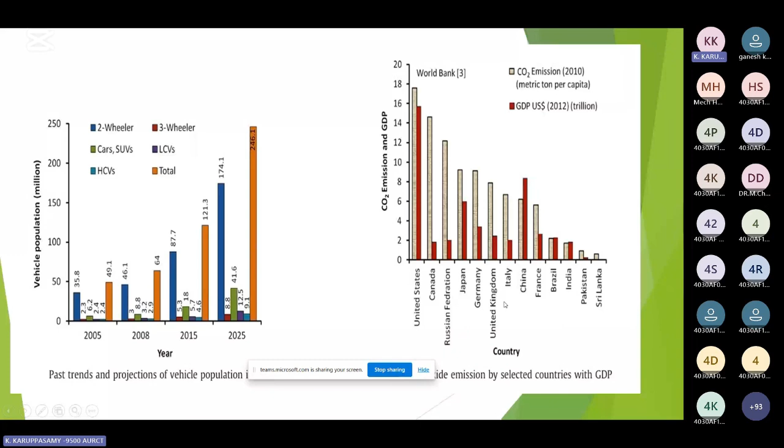Some of the selected countries are mentioned in this graph. So India's petroleum statistics for the current consumption for this year 2023-24 is 234 million metric tons. Our indigenous production is around 50, so we are importing a maximum of 180 metric tons. The cost of import is around 8 lakh crores we are spending.

For petroleum, the usage in the transport sector is around 80%. The annual consumption growth is 10% in the other sectors.

So the pollutions from conventional fuels: the major pollutants from diesel fuel are smoke, soot, oxides of nitrogen, carbon monoxide, and unburned hydrocarbons. These are the emissions coming from diesel vehicles. But oxides of nitrogen and soot are the major problems, released in higher amounts compared to gasoline.

If you go for gasoline, you have carbon monoxide, unburned hydrocarbons, and oxides of nitrogen. Here, oxides of nitrogen is the major problem for gasoline vehicles. So these are the emissions we are facing today in India.

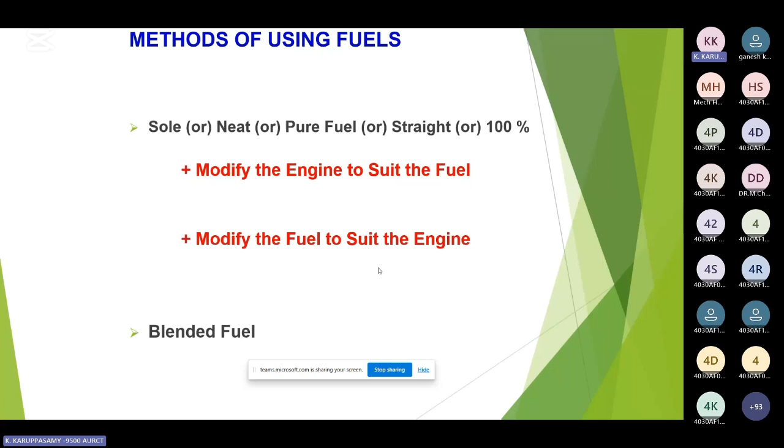Now we go into alternative fuel technology. Here, either we can use the alternative fuel as a sole fuel, neat fuel, or pure fuel state, or we can modify the engine to suit the fuel, or modify the fuel to suit the engine, or we can blend the fuel. These are the methods of using alternative fuels in engines.

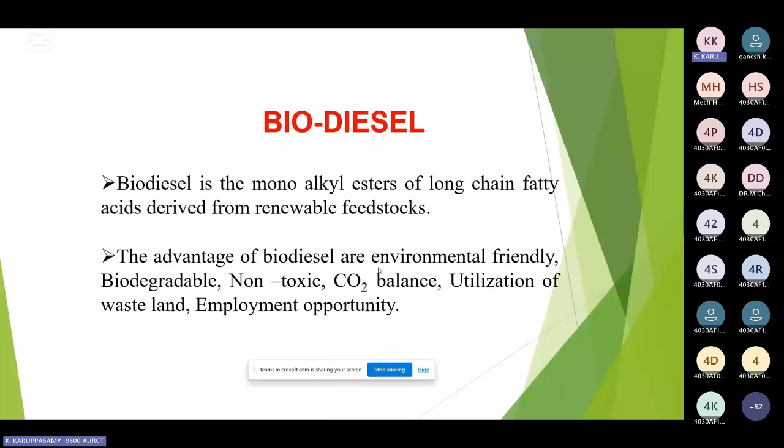Biodiesel is normally a monoalkyl ester of long chain fatty acids derived from renewable feedstock. The advantages of biodiesel are: environmentally friendly, biodegradable, non-toxic, CO2 balance, and utilization of waste. We are utilizing wastelands, and there are employment opportunities.

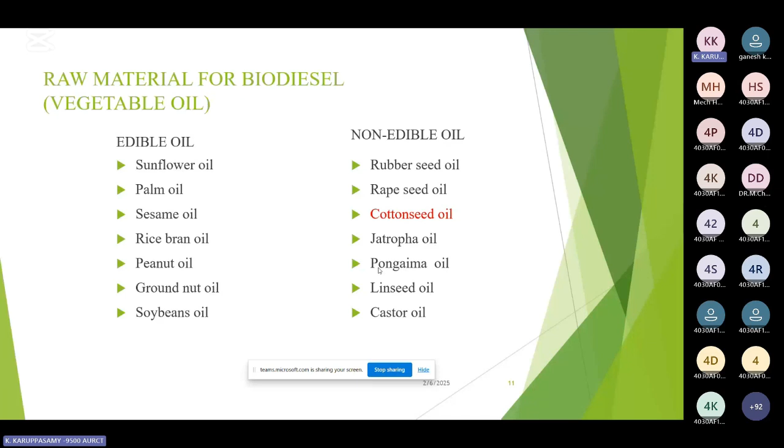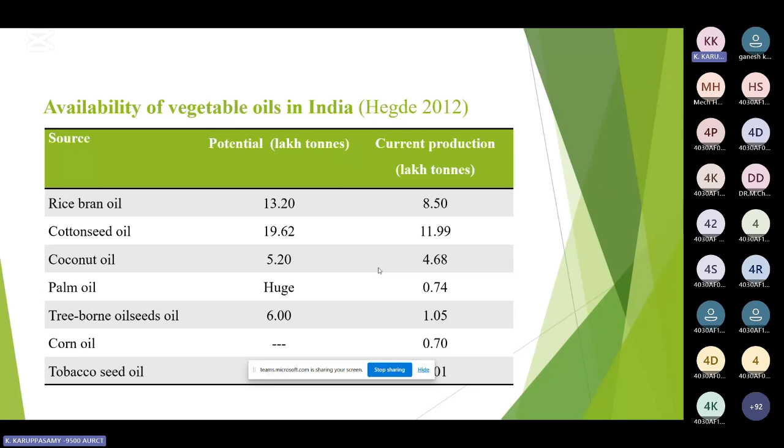So these are the availability of vegetable oil in India in 2012 statistics. Some of the statistics: cotton seed oil production is around 11.9 lakh ton, and rice bran oil around 8.5 lakh ton.

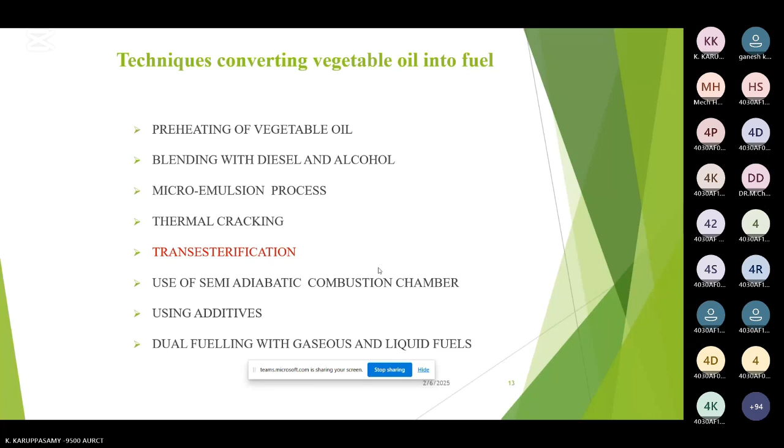So triglyceride into monoglyceride, that is monoalkyl esters. Then there's the use of adiabatic combustion chamber engines, using additives, and dual fueling with gaseous and liquid fuels. Transesterification converts glycerol esters into alkyl esters in the presence of a catalyst. NaOH or KOH catalyst is preferably used for biodiesel production.

Methanol or ethanol is used as the alcohol, along with NaOH or KOH catalyst. Finally, the alcohol esters, biodiesels, and pure glycerin are obtained after the reaction.

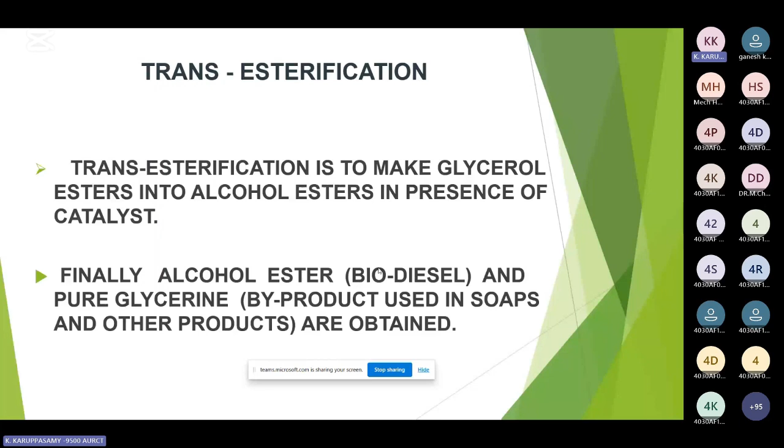Using a magnetic stirrer, we heat the oil up to 65 degrees, and with proper stirring, the catalyst and vegetable oil mix. After the reaction, with a 3-hour reaction time, we get biodiesel as well as glycerin.

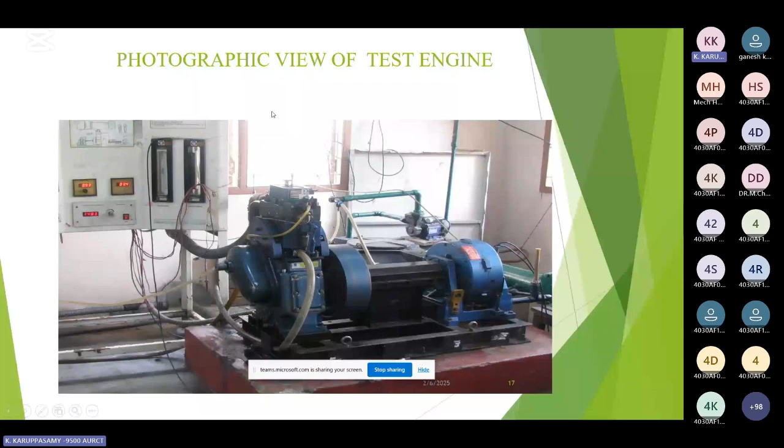For combustion, we have to measure the pressure and temperature inside the combustion chamber using a combustion analyzer. With this combustion P-theta analyzer, we can find the P-theta diagram, estimate the pressure crank angle diagram, heat release rate, and other parameters.

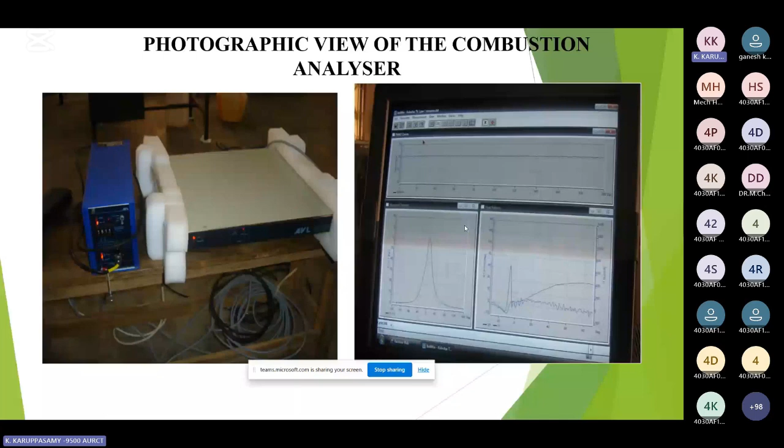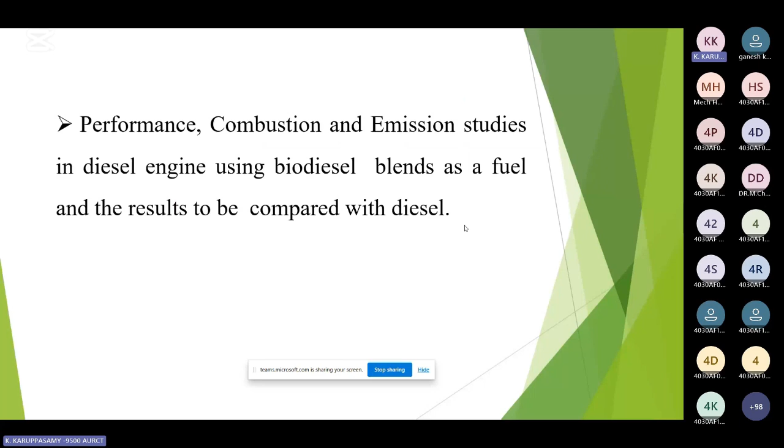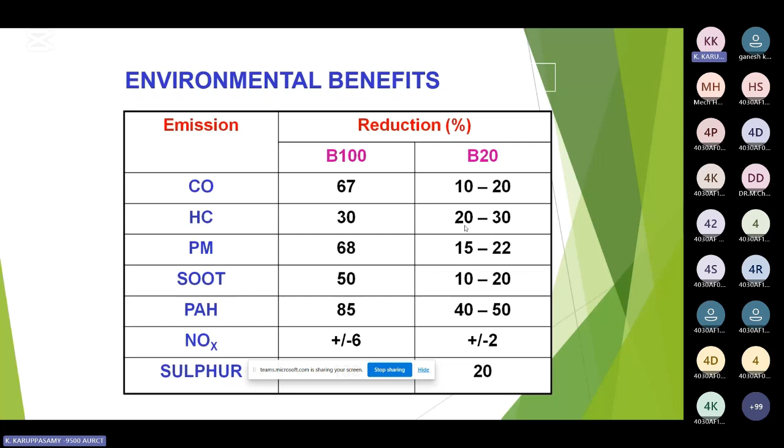When you use biodiesel as fuel, the emissions are comparatively reduced for both 100% and B20 fuel, because biodiesel itself contains excess oxygen. That is one of the reasons we go for alcohol fuel, which is obtained from natural sources as well as manufacturing methods.

Methanol and ethanol are the alcohols we are using. Some advantages of these alcohol fuels: they are obtained from a number of sources, both natural and manufactured. This is a high octane fuel, with an anti-knocking index over 100. It produces overall less emissions compared to gasoline.

It has a high latent heat of vaporization, which results in a cooler intake process, giving us less NOx emissions. And alcohols have low sulfur content in the fuel.

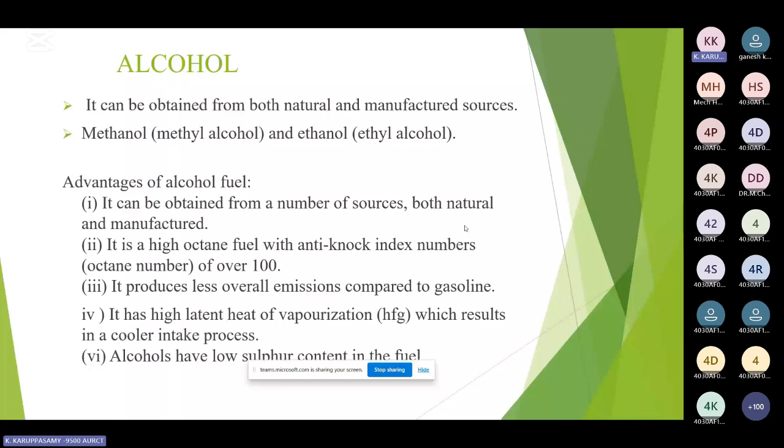Disadvantages of alcohols: they have low energy content, so the calorific value is very low compared to diesel and petrol. Combustion of alcohol produces more aldehydes, and it is more corrosive than gasoline. It has poor cold weather starting characteristics, and the flame is almost invisible, so it is dangerous when handling the fuel.

So these are the properties of different fuels: gasoline, diesel, ethanol, and methanol. In terms of calorific value, you can see that methanol and ethanol have very low values - ethanol is 27 megajoules and methanol is 20, compared to gasoline at 44 megajoules and diesel at 43 megajoules.

These are the stoichiometric air fuel ratios: for gasoline 14.9 and diesel 14.5. Ethanol and methanol have a very low carbon to hydrogen ratio, therefore a lesser amount of oxygen is required for complete combustion.

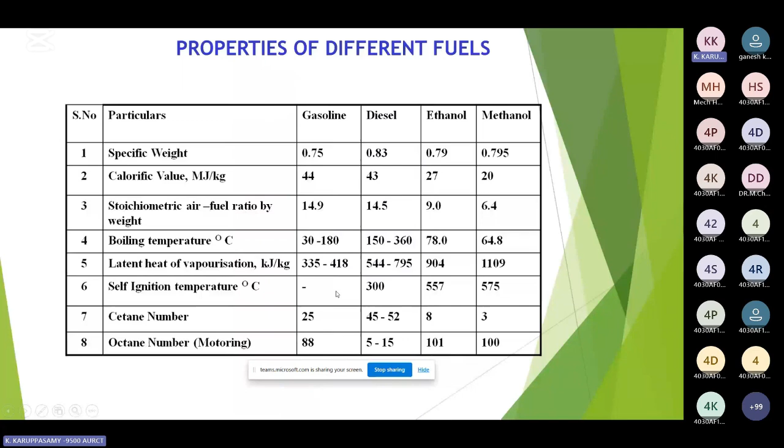These are the boiling point, latent heat of vaporization, self-ignition temperature and cetane numbers. You can see that the cetane number is very low for ethanol and methanol compared to gasoline and diesel, but the octane number is much higher, at 101 and 100.

So it is a good SI engine fuel. Ethanol in SI engines can be used as a blend fuel or solution, such as E85 or M85. E85 means 85% ethanol plus 15% petrol, and M85 means 85% methanol plus 15% gasoline.

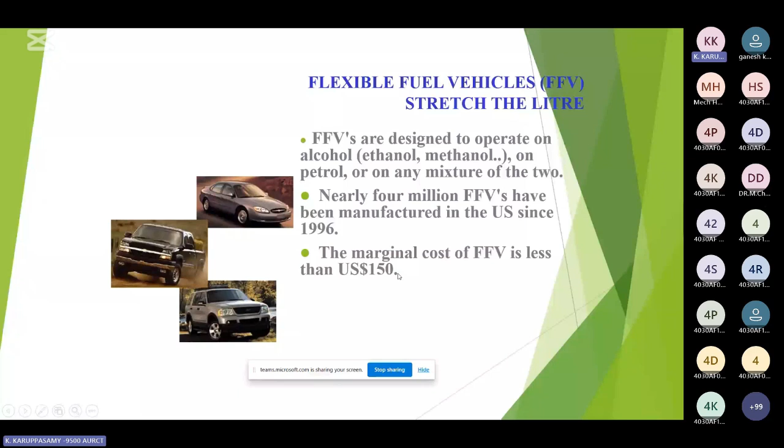Flexible fuel vehicles are designed to operate on ethanol or petrol, or any mixture of the two. Nearly 4 million flexible fuel vehicles have been manufactured in the US since 1996. The prominent flexible fuel vehicle manufacturers are General Motors, Ford, Daimler Chrysler, Honda, Mitsubishi, Mazda, Nissan, and Hyundai.

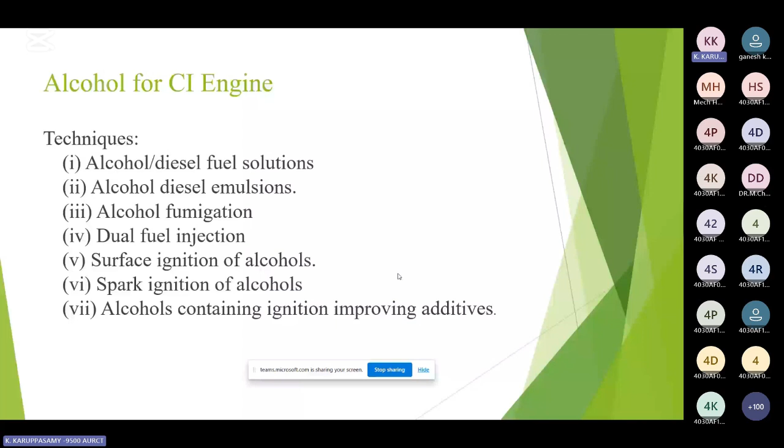Now, ethanol in CI engines: these are the techniques we use for ethanol as a fuel in CI engines - alcohol diesel fuel solutions, alcohol diesel emulsion, alcohol fumigation, dual fuel injection, surface ignition of alcohol, spark ignition of alcohol, and alcohol containing ignition improving additives. These are the various methods of using alcohol in CI engines.

Then the property of the fuel: for ethanol, the self-ignition temperature is 360, air fuel ratio is 9:1, cetane number is 9, and it has a latent heat of 1.075 megajoules.

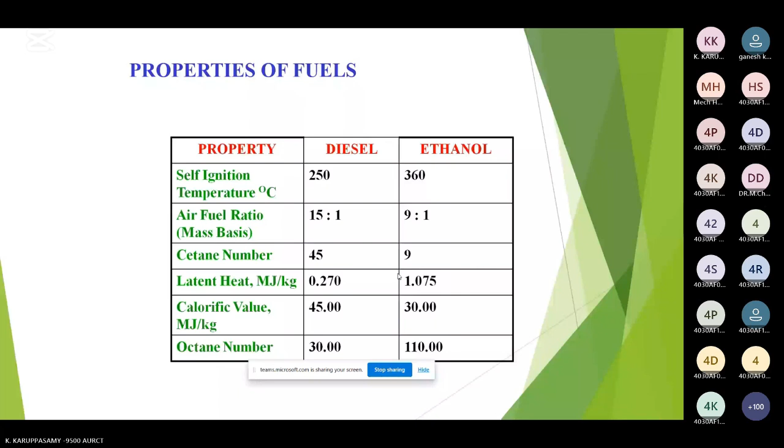The methods of using ethanol in CI engines: first is the solution method. Up to 20% replacement is possible with this method. However, phase separation happens - when you mix 20% alcohol with diesel, a phase separation problem also occurs.

To avoid the phase separation problem, we use emulsification - we add a certain emulsifier that keeps the fuel in colloidal condition for a certain duration. Stable and unstable emulsions are both possible, but the cost of the emulsifier is higher. Here, replacement is possible up to 40% alcohol used with diesel.

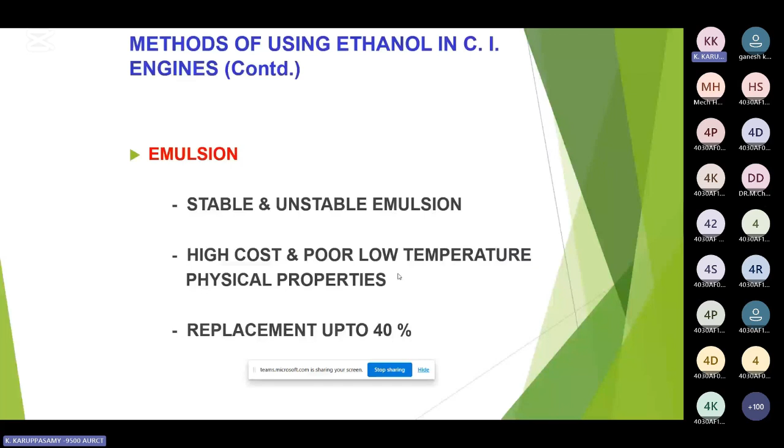Next is fumigation, one of the methods for using alcohol in diesel engines. Here a carburetor is provided - an additional carburetor is fitted for introducing the ethanol into the intake stream.

Then dual injection, that is direct injection of ethanol into the cylinder with pilot injection of diesel - up to 90% replacement is possible, with 90% ethanol and 10% diesel injected at the end of compression for igniting the alcohol fuel.

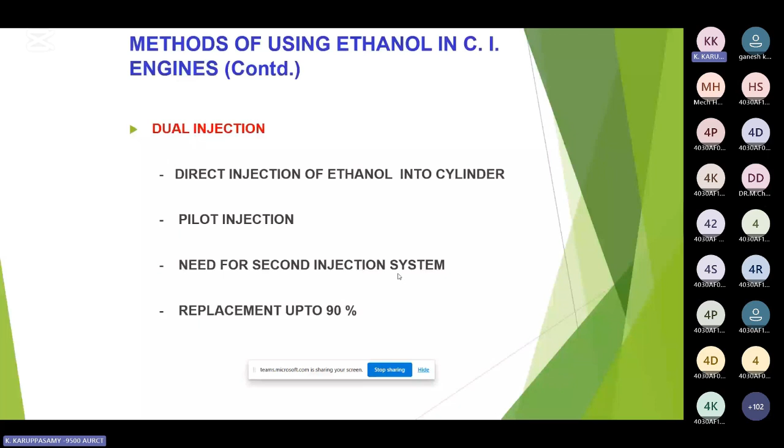These are the ignition improvers used to increase the cetane number, such as diethyl ether. With this method, replacement up to 100% is possible.

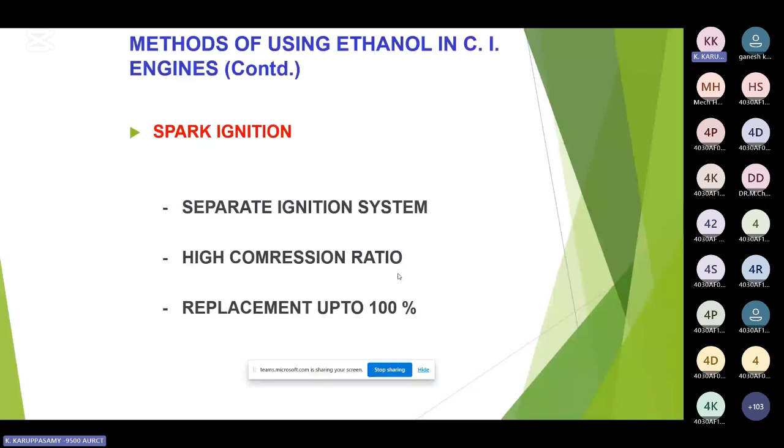Then surface ignition is another method of using ethanol in CI engines. Here we provide a glow plug, which is similar to a spark plug, inserted and threaded into the cylinder head. It absorbs heat, and when the alcohol is injected, it gets heat from the glow plug and vaporizes.

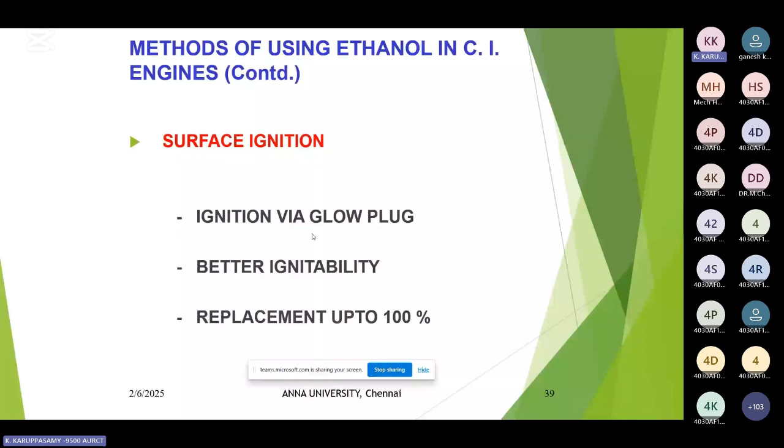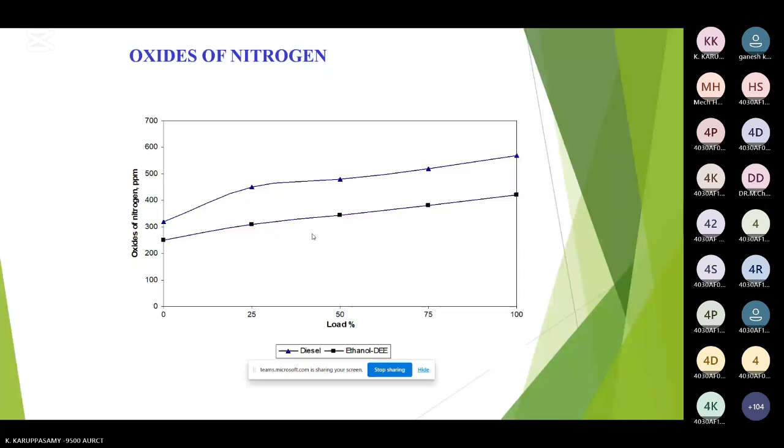Regarding oxides of nitrogen: NOx for alcohol fuels is very low because of the high latent heat of vaporization. The smoke is also less because the carbon to hydrogen ratio is very low when we use alcohol, which has fewer carbon atoms, hence lower pollution - though this requires special ceramic coatings. There is also a phase separation problem if blended, and it replaces lead.

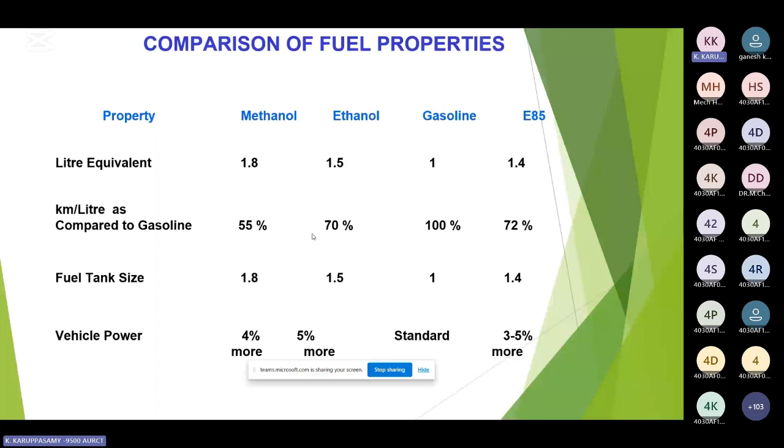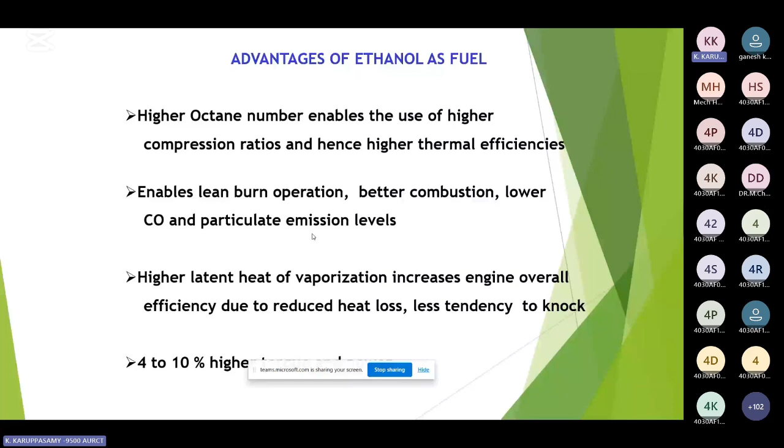A high octane number enables higher compression ratios, hence higher thermal efficiency. They enable lean burn operations, better combustion, and lower CO and particulate emissions. Higher latent heat of vaporization increases overall engine efficiency due to reduced heat losses and less tendency for knocking.

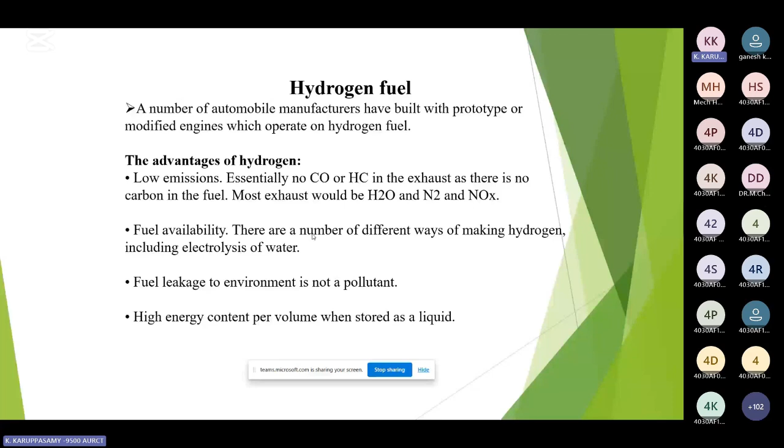These are disadvantages: requirement of heavy and bulky fuel storage both in the vehicle and in service stations. Liquid hydrogen is stored in cryogenic liquid form or in compressed gas format. It is difficult to refill, there is a possibility of detonations, poor engine volumetric efficiency, and fuel cost will be higher given present day technologies and availability.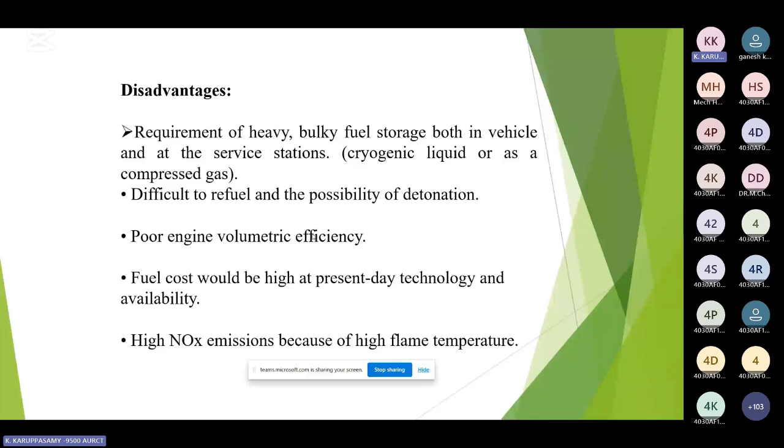There is higher NOx emission because of higher flame temperatures. So these are one of the methods.

Methods of hydrogen storage include compressed hydrogen. Hydrogen is compressed at a high pressure of around 700 bar and stored in high strength composite tanks. This is the most common method for storing hydrogen in vehicles, and it offers a balance between storage density and safety.

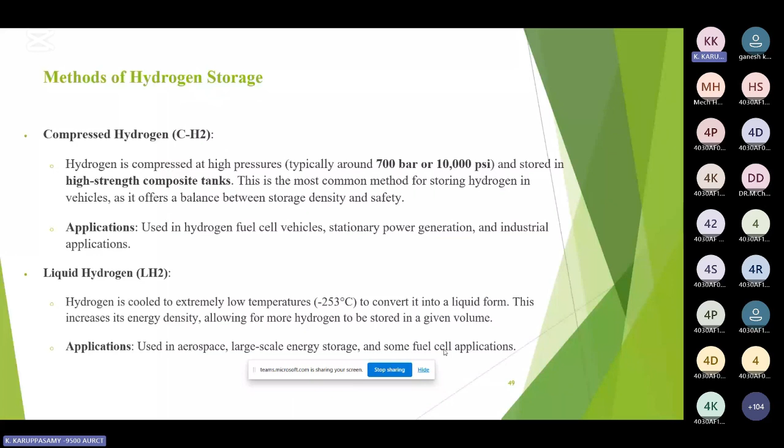With metal hydrides, hydrogen can be stored in solid form by chemically binding with metals such as magnesium or sodium. This method allows safe and more compact storage, but requires significant heat to release the hydrogen when needed.

Chemical storage: hydrogen can be stored within liquid organic compounds such as methanol or ammonia, which release hydrogen through chemical reactions when needed.

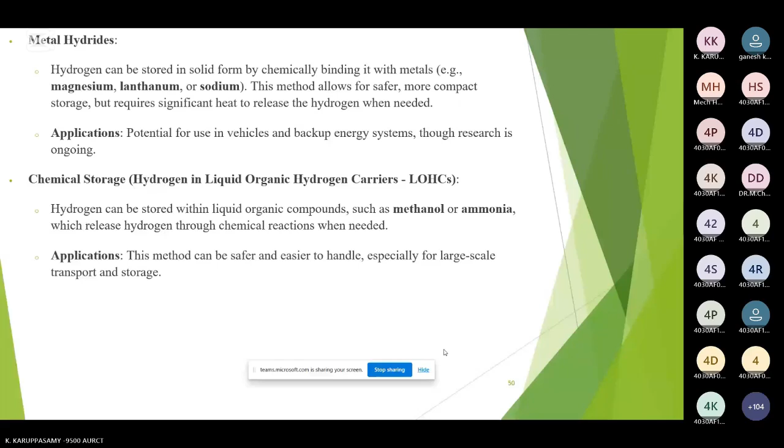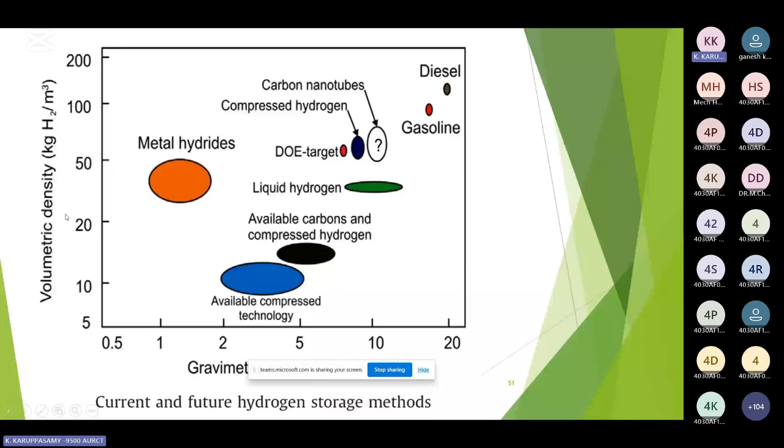So these are the technologies for storing hydrogen - that is, compressed gas technology, liquid hydrogen, and metal hydrides - considered in terms of volumetric density, gravimetric density, and volumetric efficiency. Hydrogen can be used in SI engines by manifold induction, direct introduction of hydrogen into the cylinders, or by supplementing gasoline.

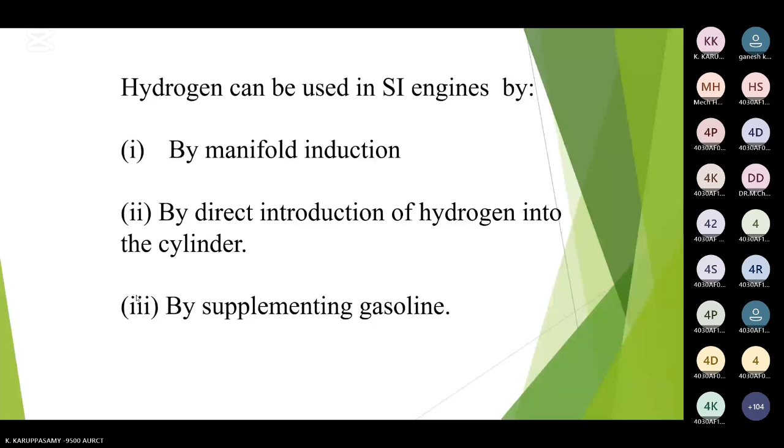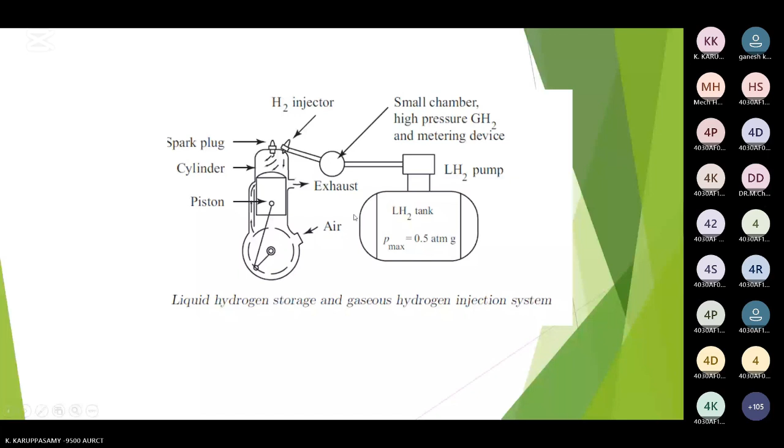These are actual engines - internal combustion engines. This is a spark plug. So we are injecting the liquid hydrogen into the cylinders, into the combustion chambers.

Liquefied petroleum gas, LPG. Previously we discussed hydrogen; next, LPG. LPG is normally a combination of propane and butane, either 50-50 or 60-40, with propane at 60% and butane at 40%. These combinations will be there.

LPG contains less carbon than petrol. LPG powered vehicles produce 50% less carbon monoxide emissions per kilometer compared to petrol, though only slightly less nitrogen compounds. Therefore, emissions are much reduced by the use of LPG.

LPG mixes with air at all temperatures. In multiple cylinder engines, a uniform mixture can be supplied to all cylinders. Since the fuel is in the form of vapor, there is no crankcase dilution.

Automobile engines can use propane. LPG has high anti-knock characteristics, with about 80% of the heat energy of gasoline, but with a higher octane number. Running on LPG translates into a cost saving of 50%.

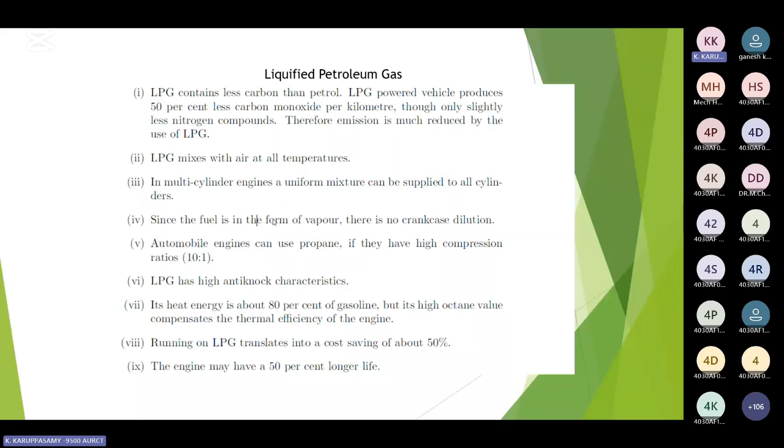The engine may have a 50% longer life also. So LPG has certain disadvantages. The ignition temperature will be somewhat higher than petrol. Therefore, running on LPG would lead to a 5% reduction in valve life. LPG vehicle weight is increased due to the use of high pressure cylinders for storing the LPG.

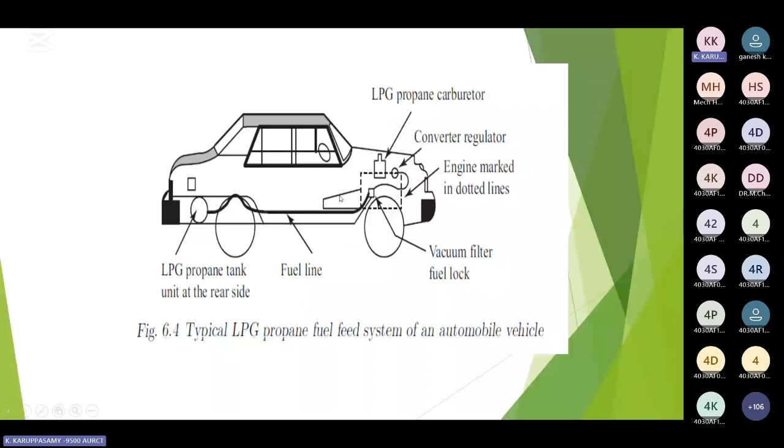At the converter, the liquefied LPG is converted into gaseous fuel. After that, it goes to the LPG propane carburetor, where the air as well as the propane or butane mix, and then it enters into the engine cylinder for further combustion process. Next is natural gases.

Natural gas - around 1998, Delhi was much polluted. Because of that, the Supreme Court ordered all vehicles in Delhi to be converted into natural gas fitted vehicles. Natural gas is obtained from oil wells.

Natural gas is a mixture consisting mainly of methane, 60 to 95%, with the remaining being a smaller amount of C2H5, ethane. It is stored as compressed natural gas at a pressure ratio of 16 to 25 bar, and as liquefied natural gas (LNG) at 70 to 210 bar at a temperature of minus 160 degrees C.

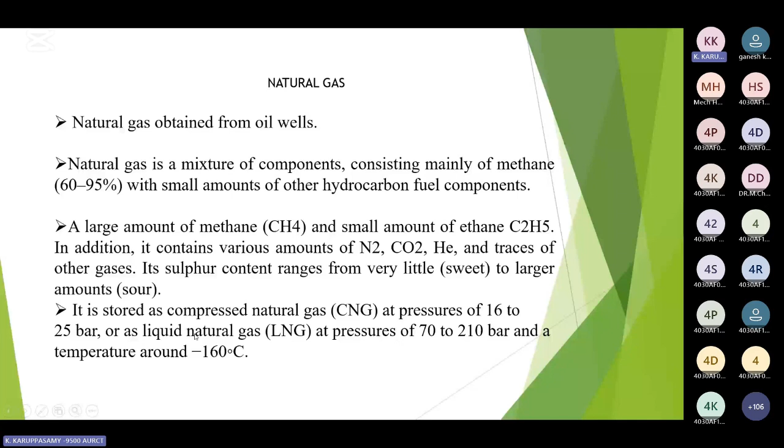The advantage of natural gas fuel is that the octane number is around 110, which makes it a very good SI engine fuel. Because of the high octane number, flame speed is higher, and the engine can operate with higher compression ratios, with low engine emissions and less aldehydes than methanol. This fuel is fairly abundant worldwide. It can be made from coal, but the process of making it is very costly.

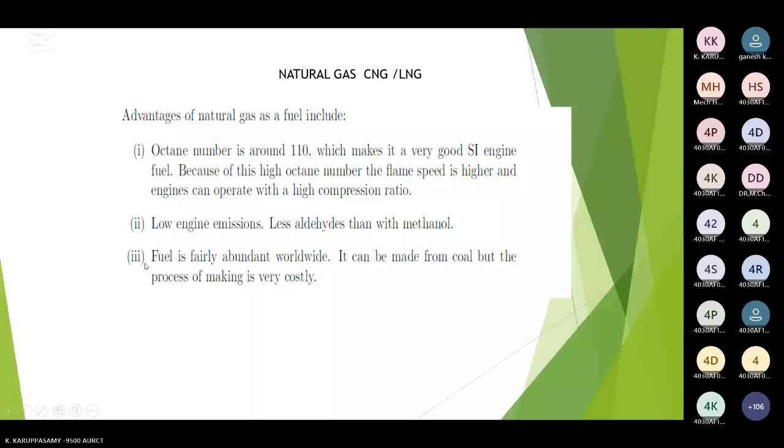Natural gas can be compressed, and then it is called compressed natural gas. CNG is used to run automobile vehicles just like LPG. The CNG fuel system is similar to the LPG fuel feed system. CNG conversion kits, like a gas carburetor converter, are used to convert petrol-driven cars into CNG-driven cars. This kit contains auxiliary parts like a converter, mixer, and other essential parts required for conversion.

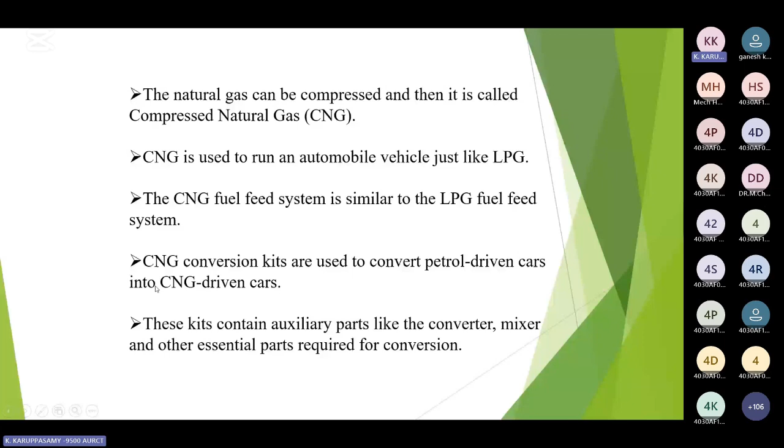This is the era of multiple fueling alternatives. You can see the various sources of energy - energy is produced from natural gases, petroleum, solar, and biomass. These are the various sources of energy.

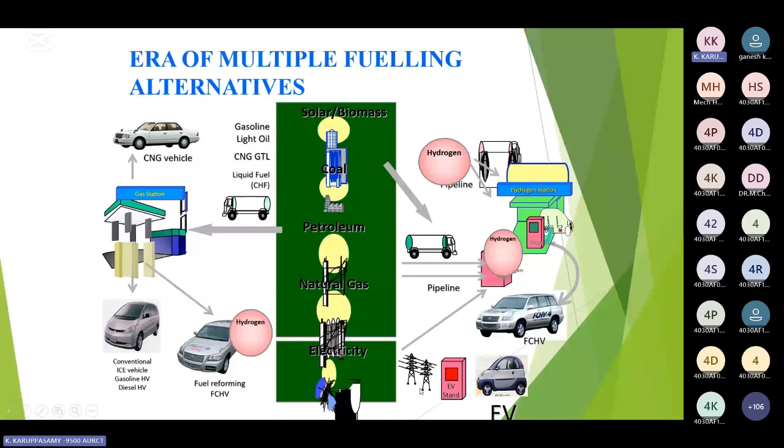We have stations like conventional fuel stations, CNG fuel stations, gas stations, and hydrogen stations. Hydrogen stations and EVs - electric vehicles recharging from the grid. These are the various options up to now.

So we covered the alternative fuels. Next we move on to alternative vehicle technology. In alternative vehicle technology, I am going to discuss electric vehicles and fuel cell vehicles.

The development of electric vehicle charging infrastructure in India is growing steadily as the country pushes sustainable mobility solutions, aiming to reduce dependence on fossil fuels. Here is a breakdown of the current state and efforts being made to enhance the EV charging infrastructure in India.

Through government initiatives and policies, we have faster adoption and manufacturing of hybrid and electric vehicles. The Indian government has launched FAME 1 and FAME 2 schemes to promote electric mobility by providing incentives for electric vehicles and charging infrastructure, along with the National Electric Mobility Mission Plan, which aims to promote electric vehicle adoption and enhance charging infrastructure.

State level support is also there - various state governments have introduced their own EV policies with incentives for the establishment of charging stations. Recently, the Tamil Nadu government also started one of the EV car plants in Thoothukudi.

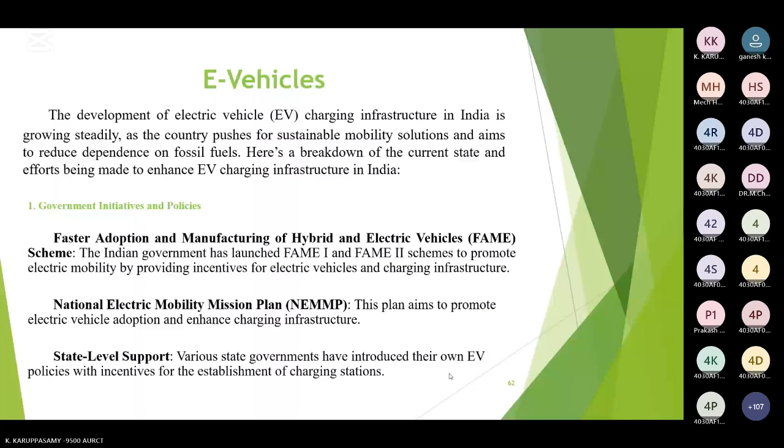Almost all automobile sectors and companies are producing e-vehicles because of the stringent emission norms. All the automobile sectors are doing more research in this area, and slowly we are converting conventional fuel vehicles to hybrid, then hybrid to fully electric. There are charging networks and public charging stations being developed.

India is working towards expanding the number of public EV charging stations across cities, highways, major transport hubs, and private players like Tata Power, Fortum, Ather, Exicom, and Reliance. We are also investing in building EV charging stations and highway chargers to support long distance EV travel. Charging stations are also being set up along the highways, which will help create an EV friendly ecosystem for intercity travels.

There are two types of charging for electric vehicles: slow charging and fast charging. Slow charging, typically at homes and workplaces, takes several hours for a full charge but is convenient for overnight charging. Fast chargers are installed at public locations like malls and highways, and can charge an EV to 80% in around 30 to 60 minutes, depending on the model.

Challenges in EV infrastructure development include high initial cost, lack of standardization, and grid readiness. These are the major challenges we are facing.

In terms of technology and innovation, there are mobile charging stations and battery swapping. Battery swapping is one method where we can exchange the battery. When the old battery is discharged, we can go to the fuel stations and exchange the old battery. This is the battery swapping technology.

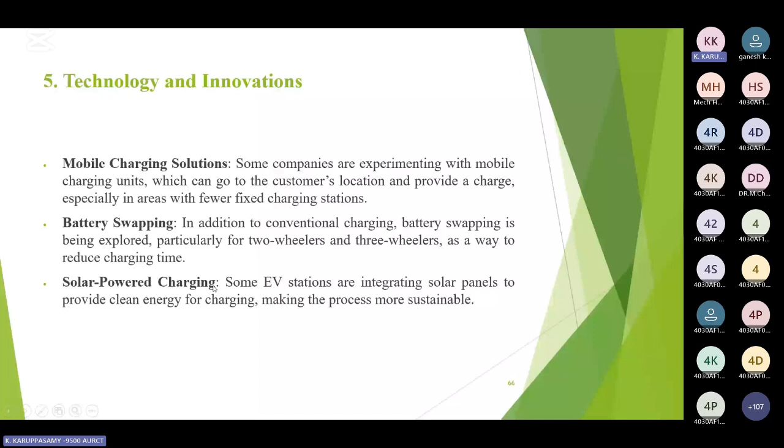For future plans, there is national network expansion and public-private partnerships. The government plans to install at least one charging station for every 3 kilometers in urban areas, along with the major highways, by 2030, and collaborate between private companies, state governments, and public entities, expecting to accelerate infrastructure development. These are the key players in charging infrastructure: Tata Power, Fortum, and Ather.

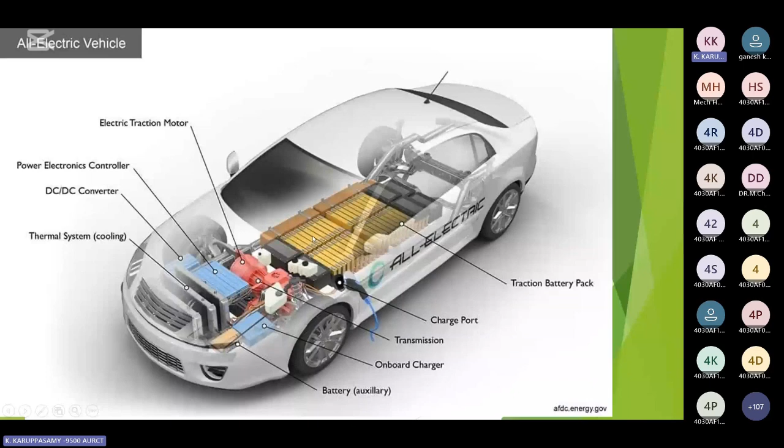Whenever we are accelerating the pedal, the electronic control module gives proper directions to the control units, and then the vehicle moves. Whenever we accelerate or decelerate, during deceleration the battery is charging. This is the regenerative braking system.

This is the charging infrastructure, the EV charging infrastructure, from grid to the vehicle. This is how we are charging: AC to DC converter, rectifiers, EMI filters, and protection units.

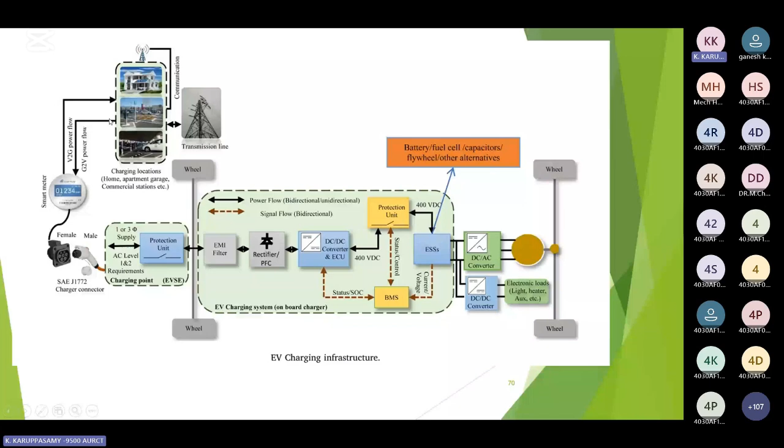These are for vehicle to grid charging stations. So these are the key components for electric vehicles: battery, electric motors, inverter, charging station, regenerative braking, and power control unit. The power control unit plays a major role in the electric vehicle, managing the overall flow in the EV.

It coordinates the battery, motor, and inverters to ensure the vehicle operates efficiently and responds to driver inputs. Whenever the driver accelerates or decelerates, it responds based on that. The EV uses a regenerative braking system which recovers energy that would otherwise be lost during braking and feeds it back to the battery, charging it.

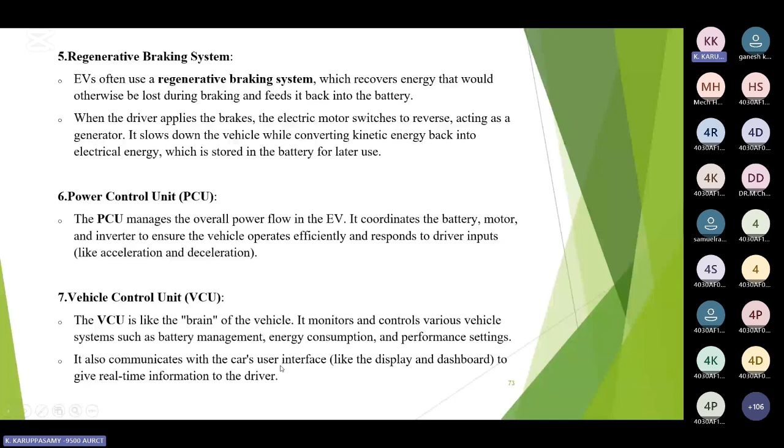The vehicle control unit is the brain of the vehicle. It monitors and controls various vehicle systems such as battery management, energy consumption, and performance settings. It also communicates with the car user interface to give real-time information to the drivers. This is how an electric vehicle works.

As already mentioned, from the battery we have DC power, then we have the inverter. The inverter converts the DC into AC, and then it moves the power supply to the electric motor that generates torque using electromagnetic induction.

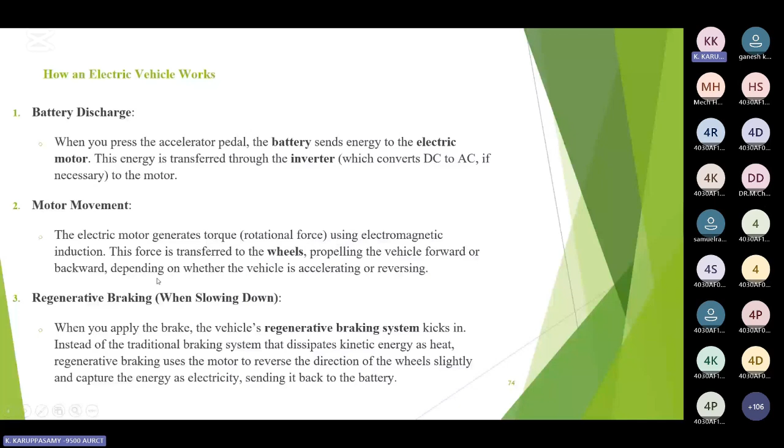This force is transferred to the wheels, propelling the vehicle forward or backward depending upon whether the vehicle is accelerating or reversing. Then we have regenerative braking, then charging the battery. When the battery runs low, the vehicle can be plugged into external power sources - standard outlet level 1 charging, dedicated charging stations level 2, or DC fast charging. The charger sends electric power to the battery, and the vehicle's onboard charger converts it into correct voltage for charging. This system helps optimize energy consumption ensuring the vehicle runs smoothly and efficiently.

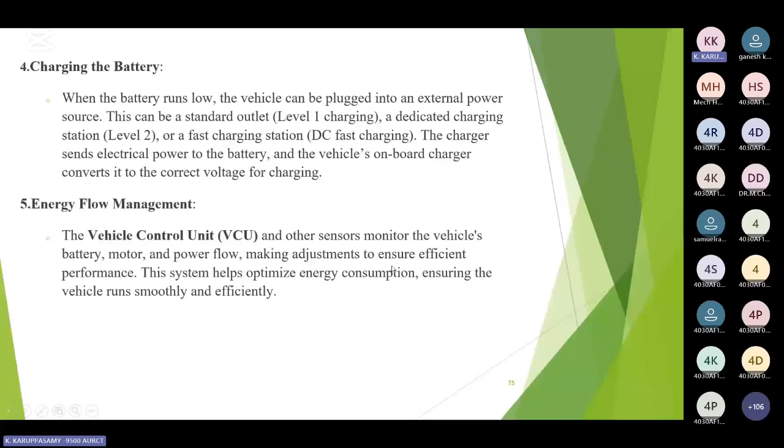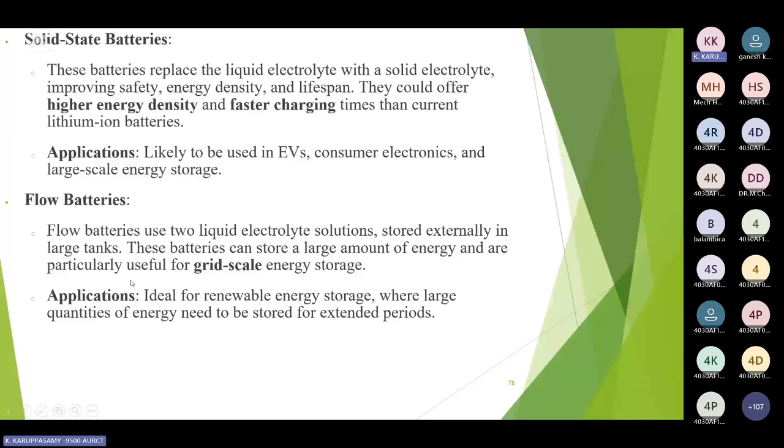Solid state batteries replace a liquid electrolyte with a solid electrolyte, improving safety, energy density and lifespan. This would offer higher energy density and faster charging time than current lithium ion batteries. Flow batteries use two liquid electrolyte solutions stored externally in larger tanks, so these batteries can store larger amounts of energy and are particularly useful for grid scale energy storage. Another one is supercapacitors, which can store energy for a shorter burst and are ideal for applications requiring rapid discharge.

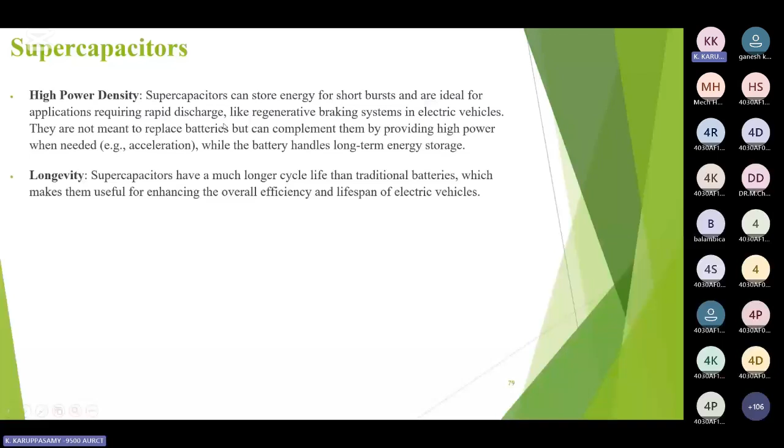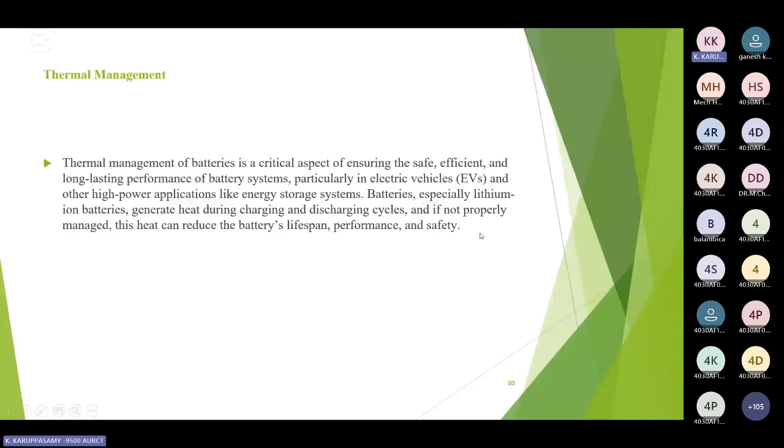Thermal management of batteries is a crucial aspect for ensuring safe, efficient, and long-lasting performance of battery systems, particularly in electric vehicles and other high-power applications like energy storage systems. Batteries, especially lithium-ion batteries, generate heat during charging as well as discharging cycles. If not properly managed, this heat can reduce battery lifespan as well as performance and safety. So why is thermal management important? To prevent overheating, enhance performance, and prolong battery life. For this reason, we have to go for thermal management of batteries.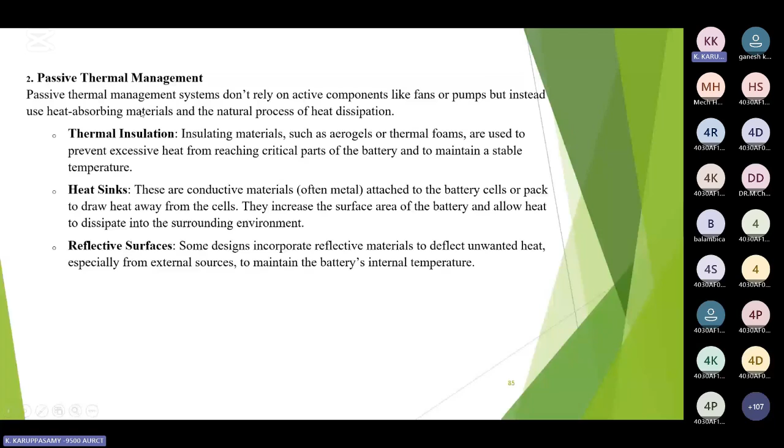Battery thermal management in electric vehicles relies on efficient thermal management systems to ensure battery temperature stays in the optimum operating range. Battery temperature directly impacts vehicle performance, driving range, and charging system.

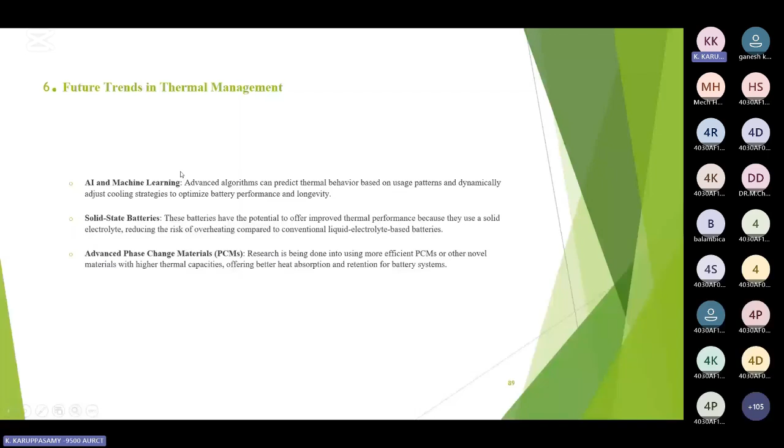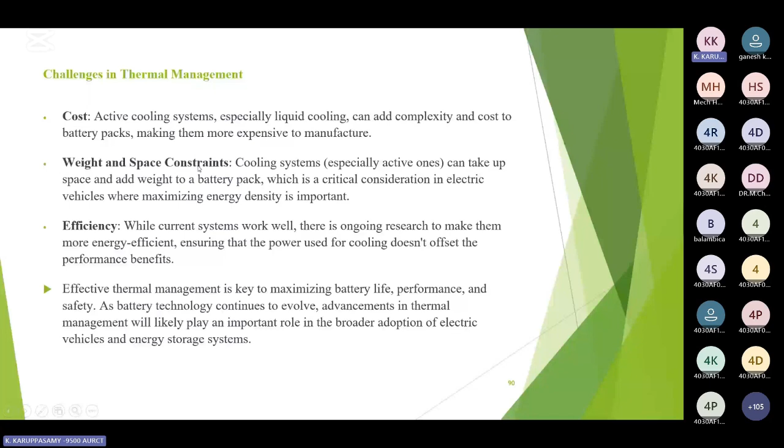Next topic: green hydrogen production and fuel cell vehicles. Green hydrogen production refers to hydrogen that is produced using renewable energy sources. The key differentiator is that it avoids the carbon emissions associated with traditional hydrogen production methods.

This involves electrolysis of water using renewable energy sources. With the help of electrolysis of water, we can get hydrogen. This process is clean, and if the electricity used comes from non-fossil fuels, the output is hydrogen and oxygen.

Water is split into hydrogen and oxygen in this method. For renewable energy sources, the electricity for electrolysis comes from renewable energy to ensure the hydrogen production process remains carbon free. Wind, solar, and hydroelectric energies are the most popular choices.

This leads to zero carbon emissions. The production of green hydrogen produces zero carbon emissions, making it a key part in the energy transition and decarbonization effort, especially in sectors like heavy industries, transportation, and energy storage.

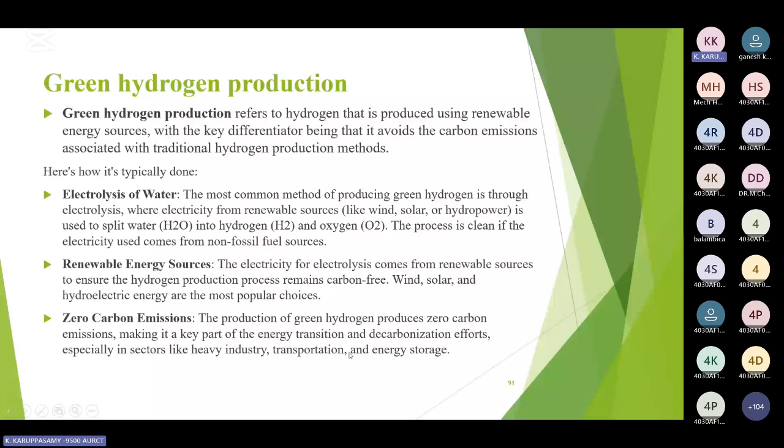Next is the proton exchange membrane fuel cell. It is a type of fuel cell that converts chemical energy from hydrogen into electrical energy through electrochemical reactions. This is one of the most commonly used fuel cell types, especially in applications like electric vehicles and portable power devices, due to its high efficiency, lower operating temperatures, and relatively simple design.

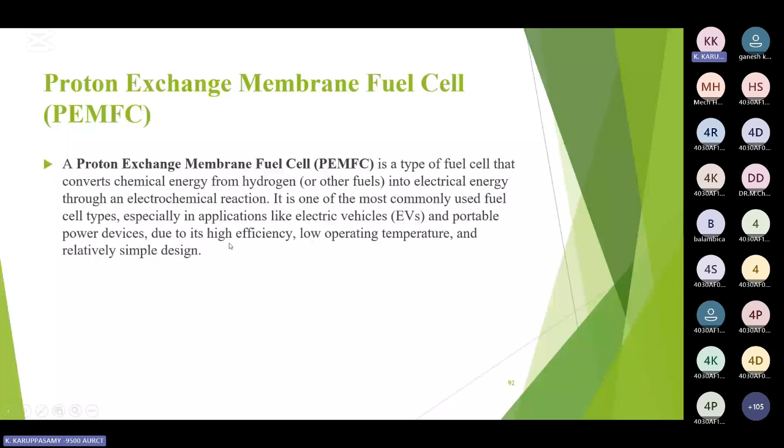This is a proton exchange membrane fuel cell. You can see the anode and the cathode. We have an electrode as well as an electrolyte. The electrolyte is placed in between here.

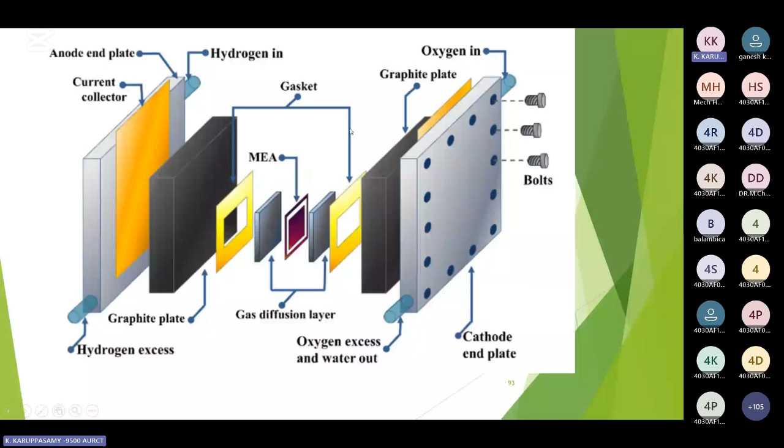On the anode side, we are supplying hydrogen. This hydrogen is converted into H plus and an electron is released. The H plus can travel, and the electron flows through the circuit. On the anode side, hydrogen gas is supplied and split into proton plus electron. On the cathode side, oxygen is supplied and combines with the protons and electrons to form water.

The proton exchange membrane allows protons to pass from the anode to the cathode and blocks electrons, which must travel through the external circuit instead. The catalyst we use is platinum, to facilitate splitting hydrogen molecules into protons and electrons. This is the catalyst used for splitting the hydrogen.

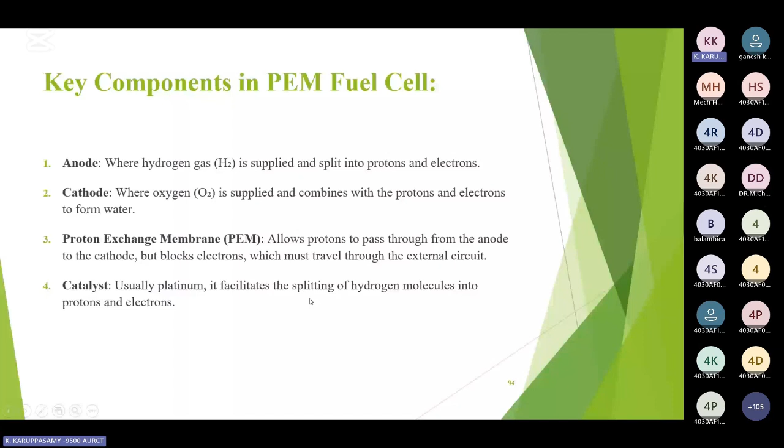This is the working principle: there is the anode where hydrogen is introduced, and the cathode where oxygen is introduced. The electrolyte is the proton exchange membrane, a solid polymer membrane that conducts protons, that is, hydrogen ions, H plus, and not electrons.

This is the proton exchange part of the fuel cell, and the catalyst layer is usually made up of platinum or other precious metals that helps split the hydrogen molecules and facilitates the electrochemical reactions. These are the fuel cell vehicles.

This is a hydrogen storage tank with high pressure safety valves, and this is the refilling valve. There's a check valve, which allows fuel in only one direction, and this is the main cutoff valve. From this, the high pressure hydrogen goes to the fuel cells.

High pressure is converted to low pressure using medium pressure, and we have pressure regulators. With the help of these pressure regulators, we can convert this pressure of hydrogen and supply it to the anode side. Cathode side already has oxygen.

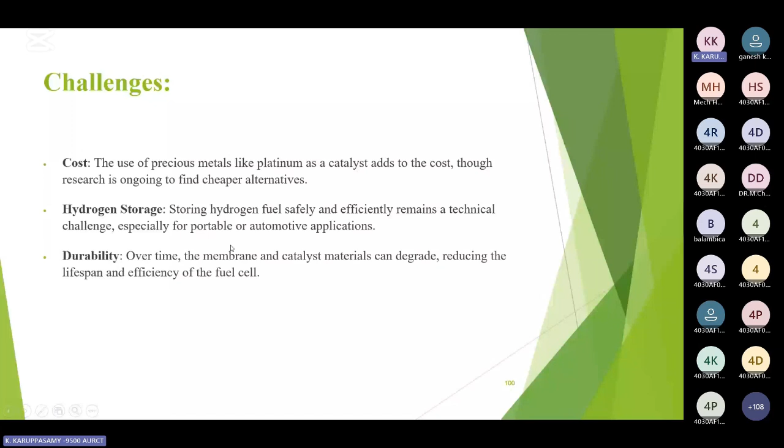From that we can get a current. The electrons flow in the circuit, passing through it, and because of that we are getting electricity. This electricity goes to the DC motor to drive the wheels and power the transmission system.

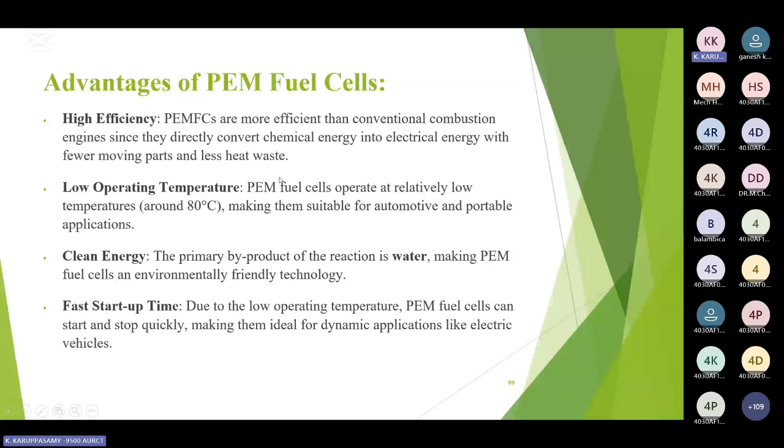These are the advantages of proton exchange membrane fuel cells: high efficiency, low operating temperatures, clean energy, and fast startup time. These are the applications: electric vehicles, backup power, and portable electronics.

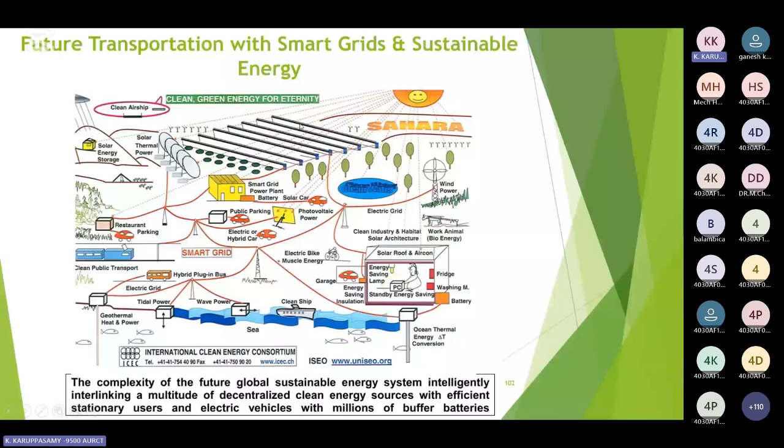This is the service benefits of vehicle to grid technology. We are getting grid stabilization, infrastructure benefits, and with the help of DR programs, environmental impacts are reduced through reduced emissions and use of renewable energies. This is connected to grid stabilization and infrastructure benefits as well as DR programs. These are the services and benefits of vehicle to grid technologies.

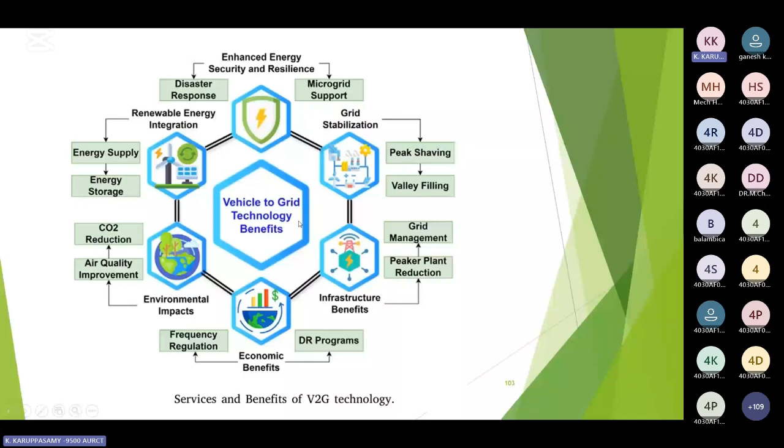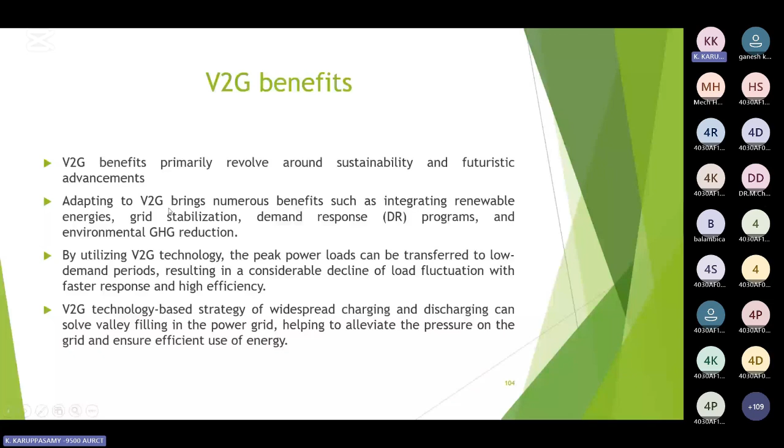These benefits primarily revolve around sustainability and futuristic advancement. Adopting vehicle to grid technology brings numerous benefits such as integrating renewable energies, grid stabilization, and demand responses.